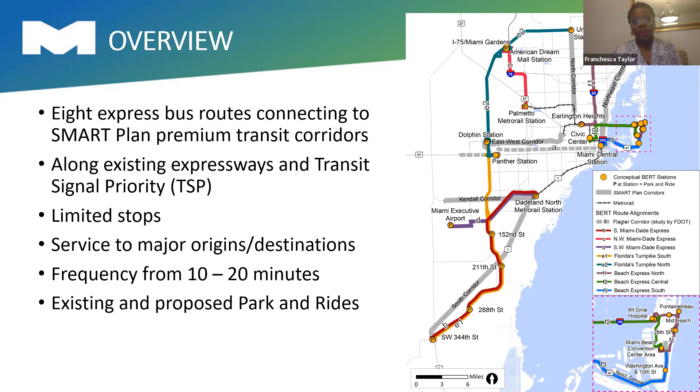So without further ado, I'm going to toss the presentation over to my colleague, Odalys Delgado, so she can discuss with us more about the route alignment for Beach Express North and Central, and how it may impact the bicycle and pedestrian community. We want to get your feedback on those services. Odalys, if you would mind taking over.

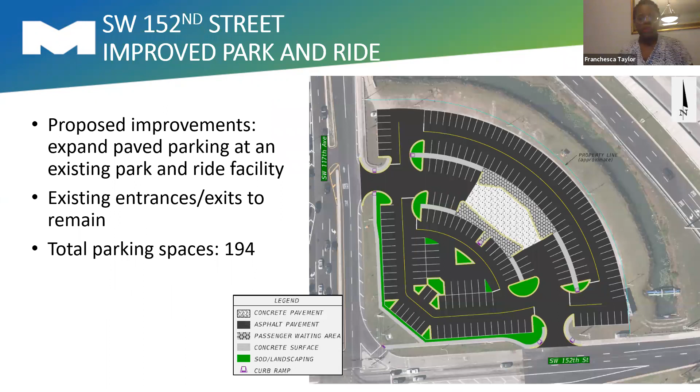And I think if we can forward to the slide that has the Beach Express North. Right, so let me just continue Francesca's overview of these BERT routes.

So the bus express routes, if you're familiar with what's running now on the I-95 managed lanes, those are point-to-point express routes. There are several routes, from the Golden Glades, and from even out in Miramar, up by the Tri-Rail station in Fort Lauderdale, that start there and use the managed lanes to express into downtown. One reason these express routes are attractive is because they're easy to implement, since you're using existing roadways, so you have to do very minimal roadway improvements to get these routes on board.

However, the reason we're here is because of the 8 routes, there are 2 routes that go to the beach that we're lucky enough to work with FDOT, which has programmed money to help build these shoulders on the Julia Tuttle I-195 to run 2 of the routes, okay.

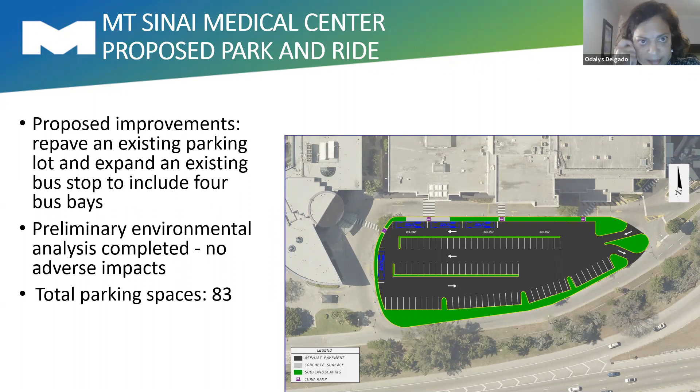So the central route is from the existing Civic Center Metro Rail station. The buses would idle on street. There's no special bus shelter or anything like that there, but there would be wherever the buses congregate now.

They would start at the Civic Center, take the 836, use the inside shoulders, which are marked red now, go up I-95 in general purpose lanes, and then go on the Julia Tuttle. In the interim they would use the outside shoulders, hopefully in 2021, and then ultimately use the inside shoulders to bypass congestion.

They would interim stop at Mount Sinai Medical Center, and this route would then just go down Alton Road with no stops to the same Miami Beach Convention Center area stop around 18th Street behind there.

So go to the typical section, which is the next slide, please. Let's just talk about the typical section, and that way they can ask all the questions now.

So we are talking just about the Julia Tuttle segment, if you see the shaded area there, for routes F1 and F2, which are central and north. The buses can only travel up to 35 miles an hour on the shoulders, but the goal is to improve speed and reduce delay for bus passengers. There will be signs and marketing and some highlights with trailers to make sure everybody knows the new pattern for bus operations, and there will be enforcement initially by the Florida Highway Patrol.

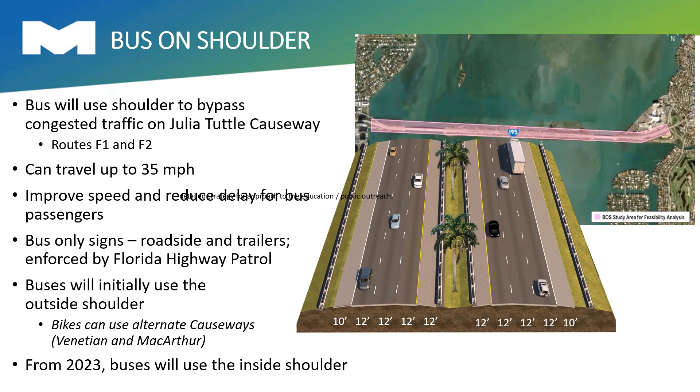So, can you go back to the map of the two routes? Let me finish with the third route first. Okay, so if you can go to the next slide.

So the final beach route is called the Beach Express South. This is really something we've worked with the city of Miami Beach on the alignment and determining how we're going to proceed. This route goes from the Miami Central Station downtown to Biscayne, then on the MacArthur Causeway in the existing general purpose lanes and Fifth Street.

On Washington Avenue is where there were plans to have dedicated lanes on the outside. We were going to take the outside lanes and dedicate them for bus and bike. This was the typical section studied by the city, and the city and county applied for grant funds to implement it, and DOT funded it. We were going to start scoping out the design of this project.

But there's been a change in the typical section out there in Miami Beach. So we're trying to determine what the actual typical section for Washington Avenue will be in order to run this service. Based on that, we see service anticipated for 2023, but depending on what happens on Washington, we may or may not meet that service date.

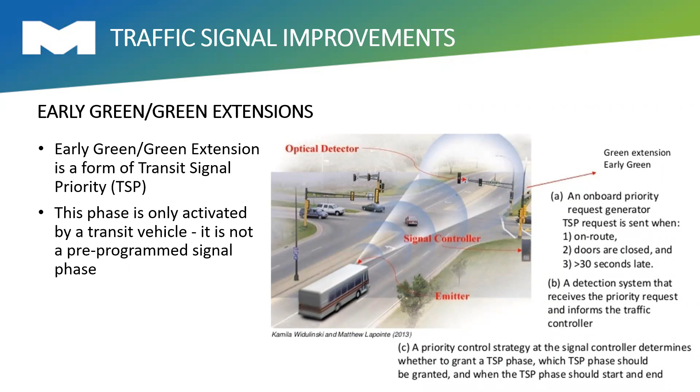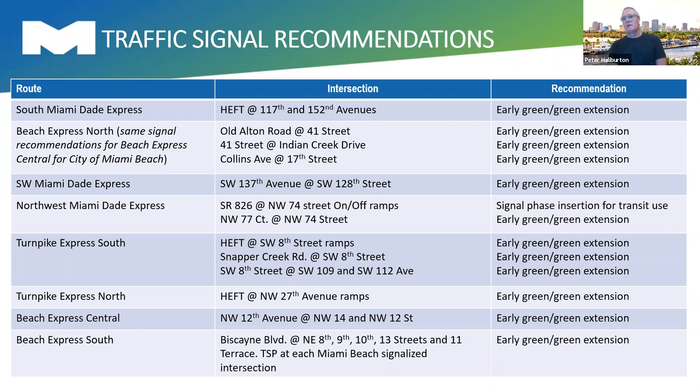The next slide shows some detail of the specific locations along each of our 8 routes where transit signal priority will be deployed, to minimize delays and feed the bus through those traffic signals, improving reliability for the BERT passengers.

The next slide touches on an additional task in our analysis known as a Title VI equity analysis. This is a federal requirement to ensure that there are no disproportionate adverse impacts to communities that have higher instances of poverty, minority populations, and limited English-speaking populations.

The next slide shows the site improvements at these 5 park and ride stations in the BERT network, numbered in the map 1 through 5 and shown in the little table to the left. There, the analysis was mostly focused on impacts from things like traffic flow, air noise, vibration, and visual impacts to businesses and residents. This analysis indicated, again, no adverse impacts.

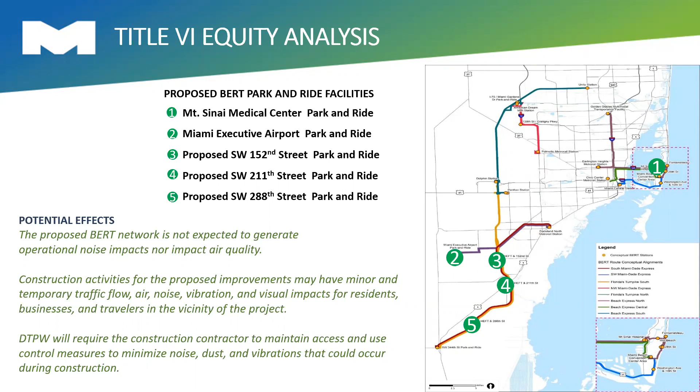No concern for noise and air quality impacts. We do, on the other hand, anticipate minor impacts during construction of these park and ride sites, but it is typical for those to be minimized and mitigated both by the county's department and any of its contractors working on these construction efforts.

The next slide is my final slide and shows the proposed year of implementation for each of our 8 routes, which Francesca largely covered. Also, in the additional columns, we've got details on the equipment needed to run these services at those frequencies I mentioned, and the resulting cost.

For that equipment, the buses, and also annual operating and maintenance costs to operate the services at those frequencies. You can see those total to $70 million in capital equipment, $27 million annually in operating expenses. And we've also got in the final columns the capital cost for the construction of those park and ride facilities, summing to almost $17 million.

So with that, I'll hand it back to Francesca, I think, but I'm certainly available to answer any questions on any of these slides. Thanks, Ross.

Hello, can you hear me? Yes. This is Eric Tover. Can you hear me? Yes.

One thing I'm very concerned about is that since you're using the shoulders on I-195, it's critical that the MacArthur shoulders not be used, because the Venetian Causeway has had all kinds of bridge problems and may be shut down for 6 months or a year, and that would leave cyclists with no way to get to the beach. It's critical that the MacArthur remain open. I know you said that it would, but I think that needs to be pointed out, because of the problem with the Venetian bridges, we need the MacArthur to get to the beach.

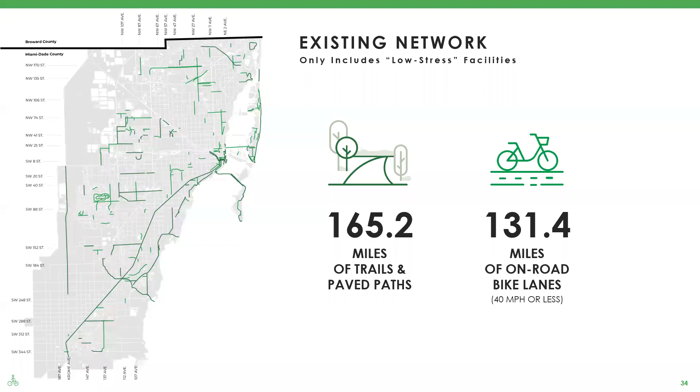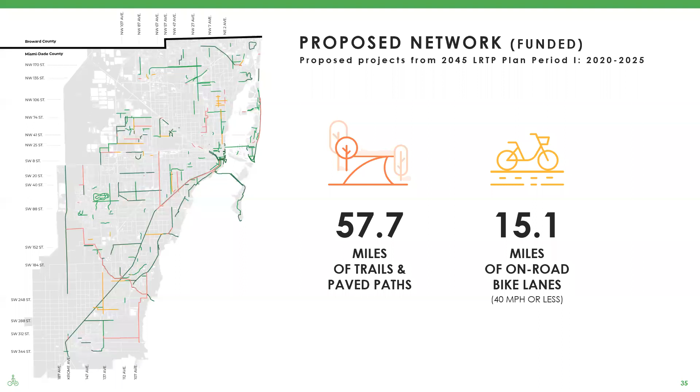And we can go to the next slide. You guys know these 2 things, it's the existing network and the proposed. This is the proposed as in the LRTP, not as in the bike network plan that's in production right now, so that's not it yet. When that comes around, and I can't wait for that, we'll have that clear bike network plan on the page, and we'll be able to see how we're adding to it within every single review period. Right, we can go to the next slide please.

I'm outlining the ones that have specific pedestrian and bicycle improvements, really bicycle improvements, but I also added ones with significant pedestrian improvements. So here's the Okeechobee Road project from east of Northwest 87th to Northwest 79th. This one provides 5 to 7 foot bike lanes on the frontage roads with wide shoulders on Okeechobee, and adds sidewalk on the north side of the frontage road, specifically between 98th Street and 79th Ave. That's an added facility I'm very happy to see.

Eric Toberg: one of the critical things is making sure the bike lanes on the frontage roads connect, so when they go under the turnpike or similar, you can get from one point to the other without having to go on the main road. Moderator: Okay Eric, wait till Tiffany's finished, then you can make your comments.

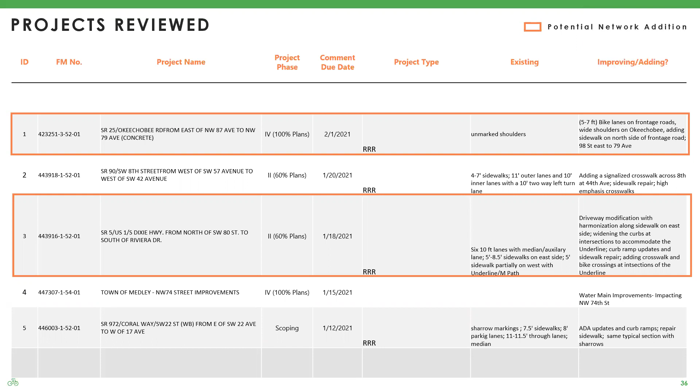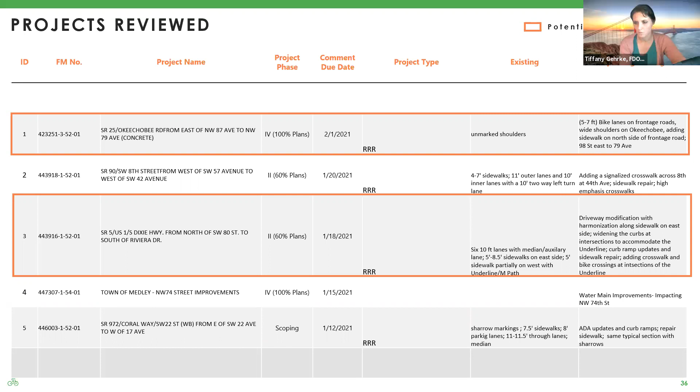And then feel free to look at the other ones. The Town of Medley water main improvements - I think that's a supplement to the other project we talked about last month. And the other ones on the page, we can go to the next slide.

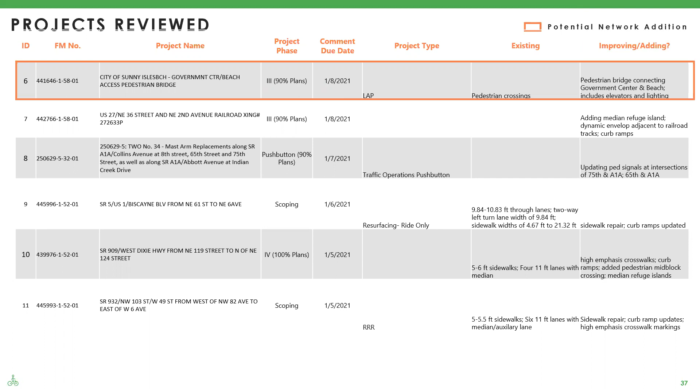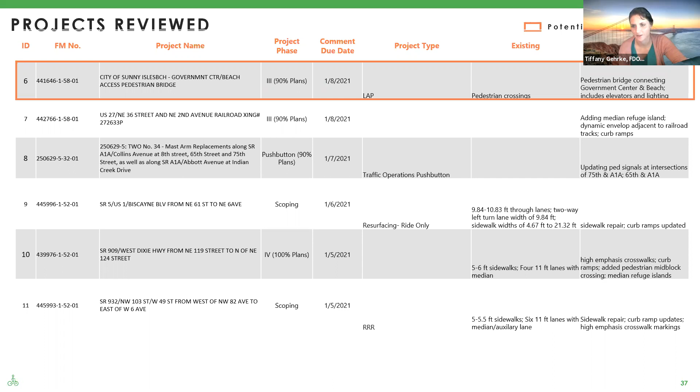The City of Sunny Isles has actually come to us with quite a few pedestrian bridges they're looking to fund into the future, but this one specifically is at 90% design, and it will connect the government center to the beach - again, a pedestrian bridge. In a future slide I'll show you an image of what it's going to look like. All of the others are pretty much typical - sorry, my cat's playing with a toy - but you can see the rest are a lot of RRR projects, traffic operations, push buttons. We can go to the next slide.

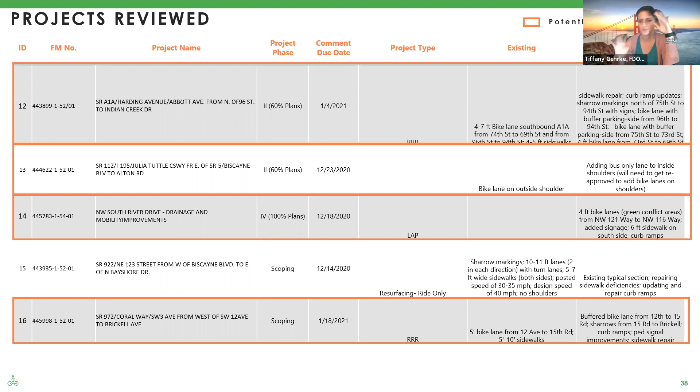Then after that on Coral Way, going downtown toward Brickell, right by the Underline and right by Publix, they're proposing Sharrows right now. I'm seeing if we can do something else, because personally I want to see something else given all the high demand there - we have the Underline, the Metro Mover, Metro Rail, Metro Bus, a trolley transfer station right there, and two bike shares. There are so many reasons that bring a lot of demand to Coral Way in that section. I think we'd all prefer an actual bike facility instead of a Sharrow.

So that's that one. Hopefully I'll have more updates, because this Coral Way project is currently in scoping, so it's a very early phase, very early stage. This is our opportunity to try to get the enhancements we really think are necessary.

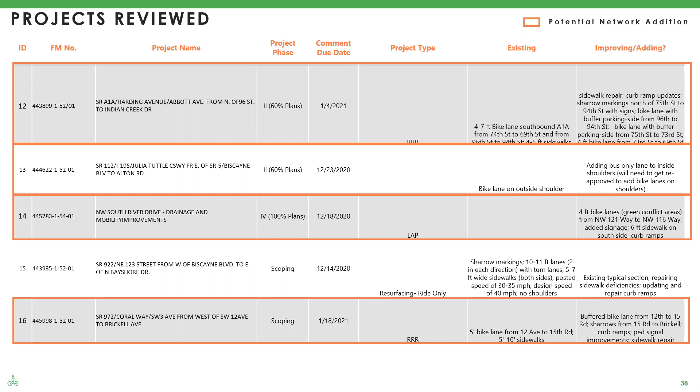All right, we can go to the next slide. This is a breakdown of all the ones I've highlighted. I try to put in as much as possible, but this is a table I work on so I can get a good idea of what's possible on these different things. When you start plugging in the AADT, the number of lanes, the functional classification, and the roadway speeds, even if you haven't ridden on this roadway before, you get a good picture of what it might be like.

So if you're seeing, for instance, a 40 to 45 mile per hour posted speed limit, and an AADT of 86,500, you know that it wouldn't be comfortable to be a cyclist riding on that roadway. It's really good that when you look at that one in particular - that's the Underline.

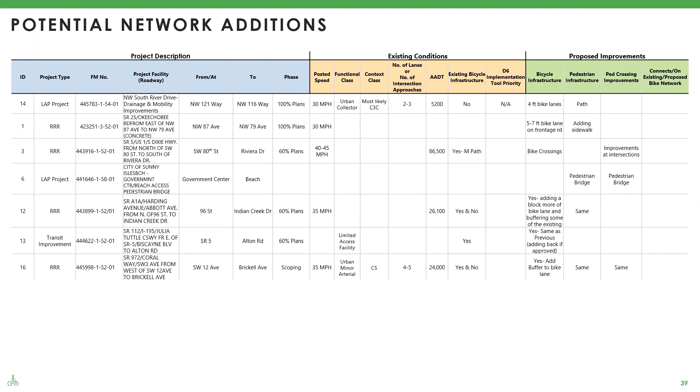So that one's a completely separated facility, which would be absolutely necessary for a roadway like that. So I'm trying to start filling this out for everyone, even if you haven't ridden on that facility before, you kind of know if the proposed improvements match what the conditions would require. Feel free, if you guys ever want me to talk this through, if you have any questions about what any of these things mean, we can always discuss that. But this is kind of for my own analysis, so I can really make sure those proposed improvements are matching what the existing conditions call for.

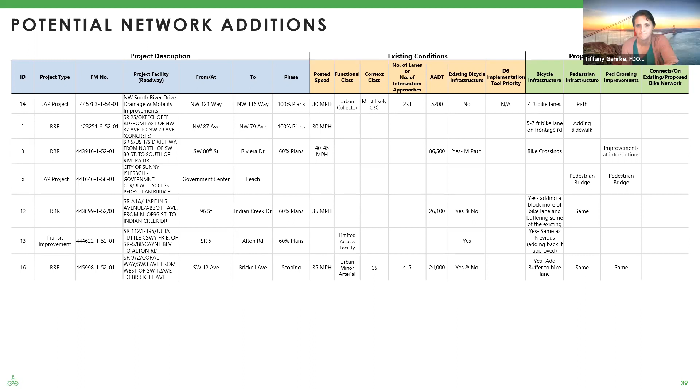Okay, let's go to the next slide. So this is the Northwest South River Drive drainage and mobility improvements. This is the town of Medley's project, and this is those 4-foot bike lanes with the green in the conflict zones, and also the 6-foot sidewalk.

Why just in the conflict zones, and why not just green? Currently the MUTCD and FDOT reads this very point blank on what the MUTCD states. And the MUTCD states that it is a traffic control measure to be used in conflict zones. So our interpretation of that is exactly as it states. And FDOT has not been willing to loosen up its interpretation.

Okay. Sometimes bikers get hit just on the straightaways too. I know, I hear you. I hear you. Shireen, tell them how much I hear it.

Yeah, Tiffany and I spent hours talking about this. So the MUTCD is really for traffic control. So these are seen as a warning that this is a dangerous area to both the cyclists and the motorists. So it's a warning type of device on the road, on the pavement.

It's not that I don't, because I hear you, I agree. And I push all the time, and I push and I push, and hopefully that pushing will just cave in. So when it finally does, hopefully I'll have something good to report. But until that point, I'm going to have to keep saying the same thing and then keep leaning in and just keep annoying central office.

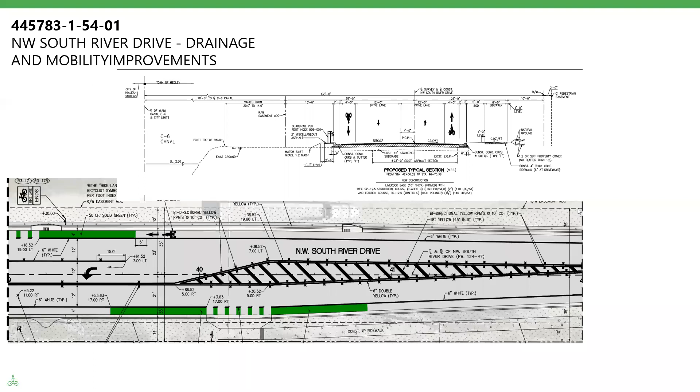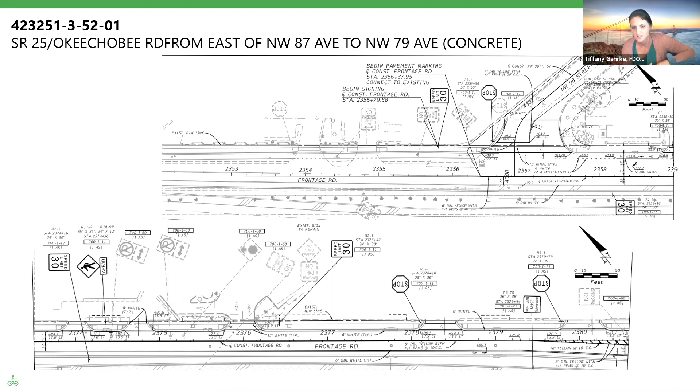This is the Okeechobee Project, where the frontage roads will have bike lanes and sidewalks added. In these images you're seeing the sign and pavement markings. You're seeing the sidewalks, but they're very faded, those little faded lines. Those are the sidewalks being added. It also clearly shows the crosswalk improvements as well as the bike lanes being added.

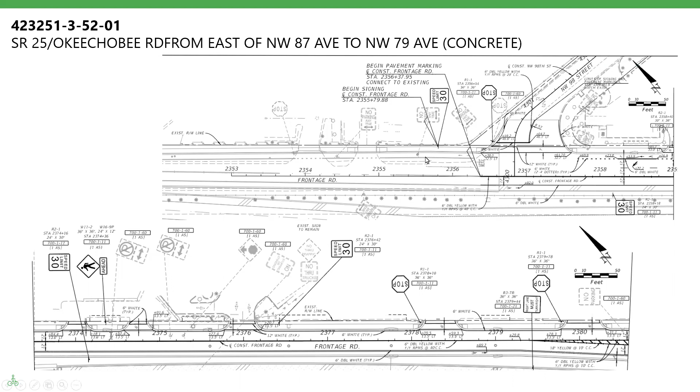All right, we can go to the next slide.

All right, we can go. Yeah, go ahead, Eric Tolberg here. One of the things you have to watch is the curb radius. A long radius curve is an invitation for traffic to drive very fast, which is inimical to pedestrians or bicyclists crossing this crosswalk.

I hear you, I hear you, I'll make sure to. I missed a meeting with the Underline the other day, because the Underline and the consultant working specifically on the intersections have been coordinating the needs with the contract consultant working on this resurfacing project, so they're working together to fulfill the needs of the Underline. But these Underline configurations aren't final, this is what they have so far, and I'll make sure to discuss this. I know that tightening up the turning radii slows traffic down, but one of the big concerns with tightening the radius on US 1 is the amount of truck traffic. However, I believe if you tightened up that turning radius there, it might still have the necessary radius for truck traffic, but that's something I'll bring back. One thing that can be done is a mountable curb, but you have to make sure the mountable curb doesn't go over the toes of people waiting to cross. Absolutely, absolutely, definitely. All right, we can go to the next slide.

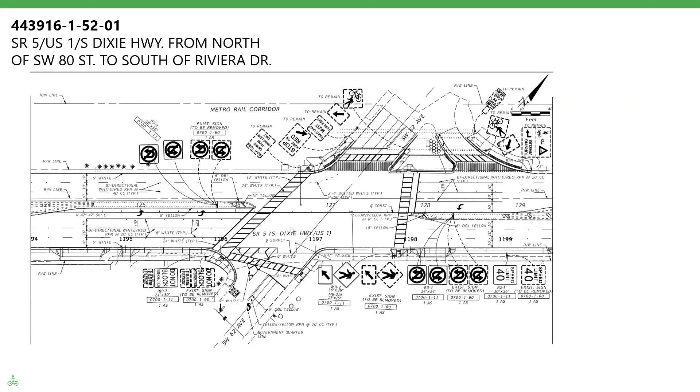The comments that I continue to make are to see if we can get at least the bike gutter put in. I don't know if anybody else has seen it, but if you've gone to the University station and used that crossing by University of Miami, and crossed on their pedestrian bridge, that actually has a gutter railing within the stairwell. If you haven't gone there, go check it out. I have one criticism, but it's always a learning experience. You can put your bike tire in there so you can pull it up easier without bumping up every single step. That would be my major comment on this project.

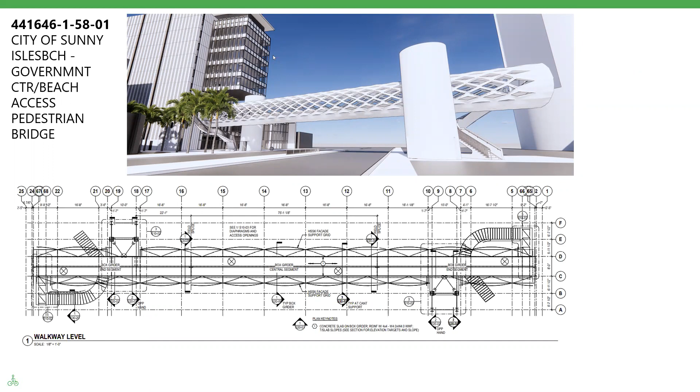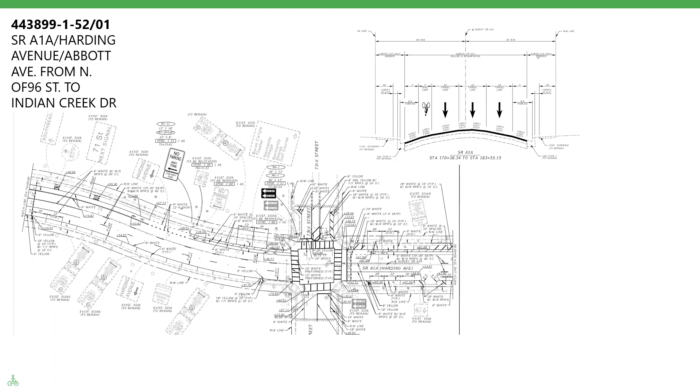We can go to the next slide. Yes, on gutters, there's one on Government Center, on the main steps from the ground floor up to the mezzanine. Also on the elevators, make sure there's easy access in and out with the bicycles. Absolutely. And then this is the A1A, the Harding Avenue, Abbott Avenue project. You can see here the buffer between the bike lanes and the parking lane.

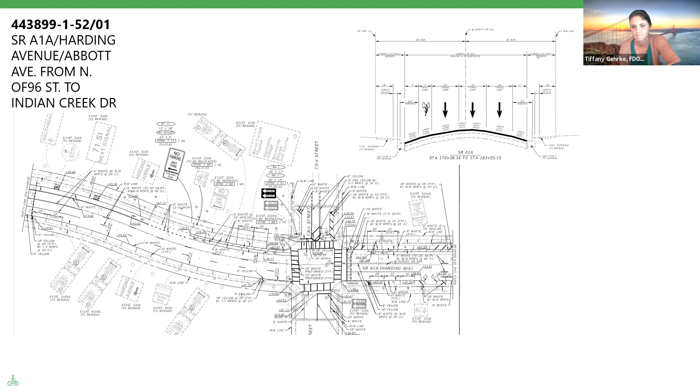Okay, we can go to the next slide. And this is near 73rd. And then, of course, I'm about to have my first workshop with the northeast section of Miami-Dade County. Again, the workshops are intended to collaborate with the municipal partners and those with jurisdiction of the roadways, so that we're all coordinating together. That very first one is going to be held on the 21st, with all of the municipalities in the northeast quadrant of the county. We'll have one every single week past the 21st until we've covered all 4 quadrants.

Is that 21 January? 21st of January. And again, these meetings, I would personally say I can send the BPAC members the invites. You can feel free to join in, but the purpose of these workshops is to make sure we're getting input from the municipal partners and the county partners, because it's going to entail projects under their jurisdiction. They need to be part of the conversation, and give us their input about feasibility based on what they've done in the past, and what they hear from their residents.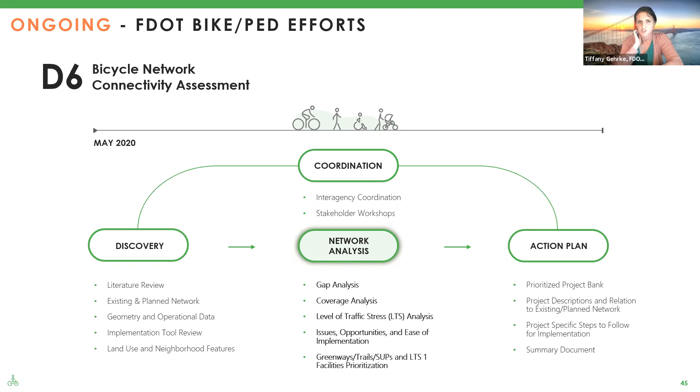Again, you can attend them, but the purpose is collaboration with the county and municipal partners, since their involvement is essential as they have jurisdiction over those roadways. However, if you're interested in listening in, feel free to. And if you do have something to say, there's going to be a last portion that's kind of an open forum, where you can provide comments on your personal experiences on certain roadways and where you believe improvements would be best. So there is an opportunity to make comments, just at the very end of the workshop.